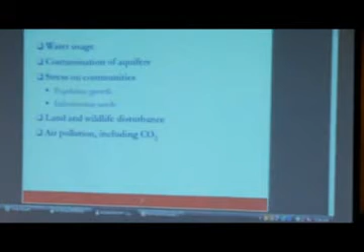So we start out with the issues, and our previous speaker outlined pretty much these same points, so I think these are no surprise, and I suspect most everybody agrees that these really are the issues we have to be dealing with.

I'd like to start by going through some historical information. This was a paper I published while at the Lawrence Livermore lab about 3 years ago, and there's two tables here, the top and the bottom. We'll go through them sequentially.

The point of the first table is that there are a lot of different kinds of processes out there, and they are quite different in their characteristics. So if you try to say oil shale is a process that is this or does this or whatever, it's most likely not going to be generally true. So you have to be very careful when you make any analysis of the situation. You're actually talking about a specific process, a specific location, because the details are different in very large ways.

Now, this particular table has been updated. That actually also appears in Wikipedia, so you can look it up at your leisure. But there are lots of different ways of generating and transferring heat to the shale, and that process can occur either above ground or below ground. And these are only some—there's probably a lot more processes that exist. In fact, when this particular table was made, EGL was the leaseholder. It's now AMSO, and I don't think the Exxon Mobil process appears on there, but it does on the later Wikipedia version, which I would encourage you to look at if you care.

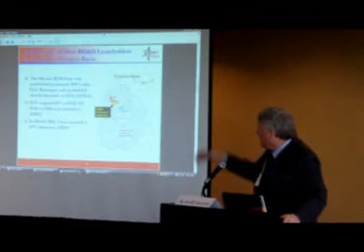So here are the leases. The yellow one is AMSO, formerly EGL. This gives you a bit of history about our company. It's now currently owned 50% each by IDT Corporation and Total. IDT is the operating partner in the R&D phase, and Total will be the operating partner in the commercial phase.

There are other companies actively pursuing oil shale. Here are three examples, taken from public presentations these companies made. You need to be aware these are cartoons representing a snapshot in time—they don't really give you detailed information about their current thinking. So I give you that caveat.

Basically, the Shell one talks about recovering the oil shale over normally a 1,000-foot interval. A lot of that is in the leach zone, which is very highly porous with a lot of water. In that situation you have to protect the water—there's just no choice, and that's why they do the freeze wall, spending a lot of money developing and demonstrating it.

Chevron is talking about some sort of proprietary fracturing inside the Mahogany zone and a supercritical carbon dioxide extraction. We don't know very much about what they're doing, since they don't talk much about it.

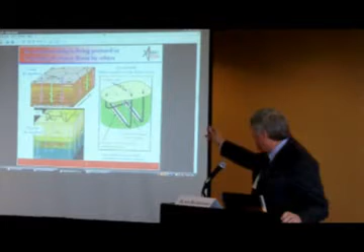Exxon is the other one, where they use a hydrofrac and then prop it open with a conductive material, using the heat diffusing from these planes. There's an advantage to using parallel plate heaters compared to the line source heaters in Shell's process—you need far fewer wells, and with these U-wells, the surface disturbance from an Exxon Mobil-type process would be far less than the geometry shown for Shell.

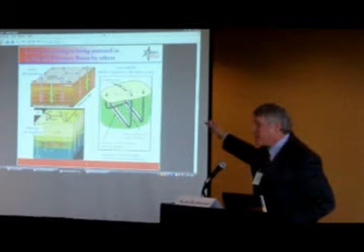By the way, Shell has actually done other things like that. I'll make the point that the reason Exxon was in this lease is that people claim private land is available. The fact is, private land is not available for an illitic oil shale, and that's why the two applicants in Colorado are going after illitic.

So anyway, I'll quickly go through the AMSO process. This is our process—we're going through the lytic shale, underneath which is an illitic oil shale cap. We're going to avoid the water contamination.

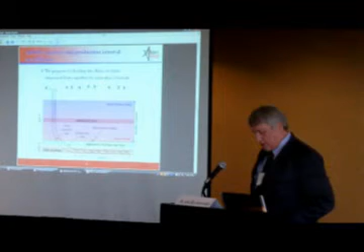If you look at the royalty generation, there's actually quite a bit of money that would be generated by an activity as small as 100,000 barrels per day. But keep in mind that 100,000 barrels per day is still more than Colorado currently produces. I can make a comment about royalties later.

I think the current industry estimate is more like a barrel of water per barrel of oil. A lot of analyses are using very old information, and in fact the cost of cleaning up saline water has gone way down. There's lots of reasons why water is really not nearly as much of an issue as people tend to make it out to be.

Projected to a 100,000 barrel per day plant, you'd use nominally 100,000 barrels of water per day. That's a tenth of a percent of state water, and it would generate 1% of the state's GDP. So it has a tremendous economic gain in terms of its use.

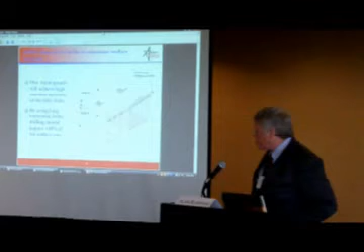This is our process in terms of trying to minimize surface disturbance by using horizontal wells, less than 10% surface disturbance. The final slide shows there's been a lot of work done historically on reclamation—Jack Clark, who's in the audience, was involved in this, at Tract C-a, Rio Blanco. You can see the green fenced-off area versus the non-fenced-off area, where the feral horses come in and eat the grass. So that's another thing we have to think about—how wildlife will affect this.

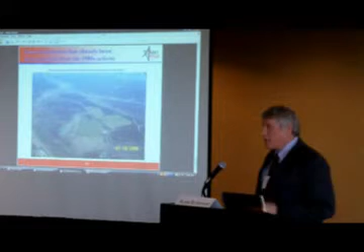Anyway, so that concludes my introductory remarks.

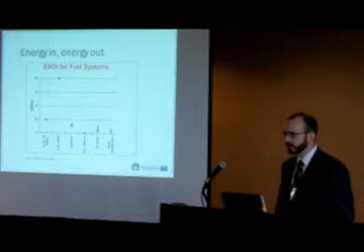Does the fuel produced from oil shale contain more energy than what went into producing it? Nothing in the existing literature, which is based on endeavors published to date, suggests that this is so. Importantly, the literature isn't small—it's far-reaching and extends back more than two decades.

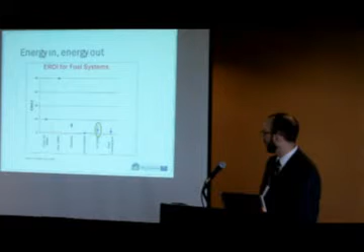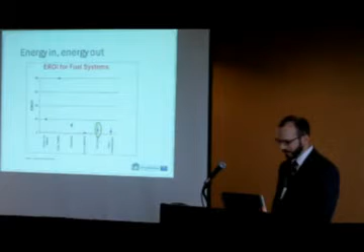What I'm circling here is the margin of error for oil shale relative to other energy sources. In that box and whisker plot, you can see the outer bound. Even at the most optimistic EROI, or energy return on investment, figures, oil shale is far from certain to guarantee energy levels on par with conventional resources, while other resources might be able to do that.

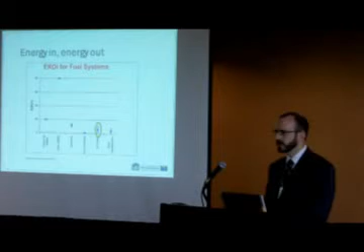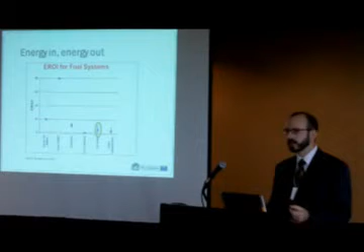A second question, maybe more important as we look to transition to a clean energy economy, is the type of fuels used to fire the heat required to finish baking shale—the Earth simply hasn't provided that yet. It's a social question of trade-offs: what is the best use of electricity, natural gas, and other energy inputs? Is it transmuting into a liquid fuel, or applying directly to other parts of the economy?

Second, we have to talk about the social burden of development. As most of the room probably knows, shale oil produces a heavy distillate, which needs to be upgraded, transmitted, and then finally refined into a saleable product.

The refining capacity in this region is not sufficient in any way to meet the expected levels of production. A substantial new infrastructure will need to be built that's capital intensive, and ultimately the viability of many of these technologies will rely on broadly distributing those capital costs. I don't think any single industry or company is going to be able to make oil shale happen on their own.

To put that in context, this is a region already benefiting from, and experiencing the downsides of, the significant energy boom for oil and natural gas development. Services, especially in the western part of this state, are being stretched to the breaking point. Oil shale has to be fit into an assessment of other ongoing activities.

As the 2008 report from the Associated Governments of Northwest Colorado pointed out, a commercial-scale oil shale operation would add to the region's population by 25%, straining the ability of governments to provide services like schools and safety services, pushing skilled workers probably beyond the threshold of what's available, and straining the availability and affordability of housing. All of this needs to be considered when we look at whether and how to move forward with developing these technologies.

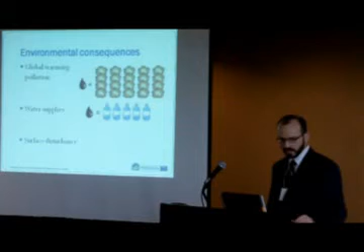And groundwater fouling is as important as water availability. The safety of these technologies in terms of groundwater have yet to be demonstrated and need to be addressed. And of course, there's surface disruption.

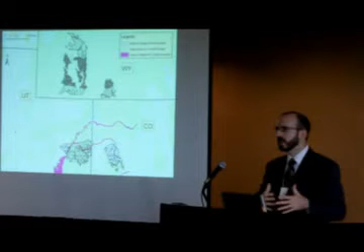We've got to fit our expectations for oil shale into a region that has already experienced a great deal of pressure. That's really the only point here. It's not that it's a game stopper per se. Ultimately, the success for this enterprise relies on economies of scale to distribute these capital costs broadly, as I said.

We must be sure that the scale of impacts against which we weigh our decisions today are commensurate with the scale of development implied by the promise that many point to. These are questions that clearly the department is thinking about, and we laud them for doing that, because these answers are the threshold to making determinations for whether and how we proceed.

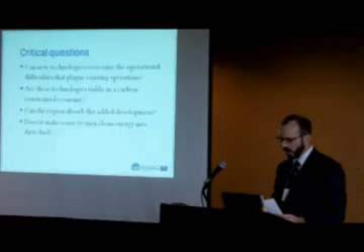Ultimately, as I said, our decisions today are going to shape the course of oil shale development going forward. Without a tremendous return on energy invested in extraction, shale oil functions at this point on paper more like a massive effort to turn electricity or other energy sources into a liquid fuel, with a minor payback for that investment, when other cheaper options for use of those energy inputs seem to be available.

Clearly, we need research to answer these questions, but early results suggest that heavy investment in this technology at this point in time is a distraction from other superior options to which our attention and our monies could be going.

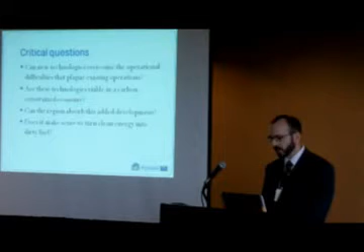In our transition to a sustainable energy economy, we need to find alternative clean energy sources that offer higher returns comparable to conventional resources, instead of playing a shell game with our energy. We also need to look to energy sources with fewer impacts that can be managed with an affirmative stewardship duty as the carrying capacity of this landscape continues to diminish. Thanks, and I look forward to your questions.

This is where the yoga instructor says, breathe deeply now, keep stretching, keep stretching. Our kind of yoga instructor coming up next, actually, somebody who is really equally involved in renewable and fossil fuel issues. Michael Tupper is the Executive Vice President of Composite Technology Development. He's a mechanical engineer. He didn't get the memo about how important federal involvement was going to be in this, so I think you were our only panelist who's never worked for the federal government or a federal lab. Should we let him speak? I don't know. Maybe that actually adds a little bit to the reasons to have you speak. So, Mike Tupper. I have to admit, though, our company has used a lot of your tax dollars to create some wonderful technology.

One of the, so I'm third, so I get to have some reflection. I think one of the most interesting things that I've seen so far today is mostly what we're seeing up here are cartoons, and I think that's a pretty good indication that this is a very new and nascent technology and industry, and it's a very complex issue. And I think everything that has been said so far is completely right, but that doesn't mean that we can all point in one direction.

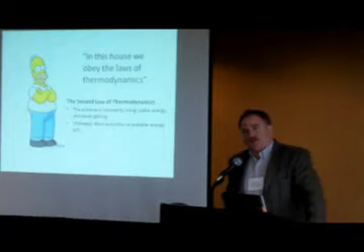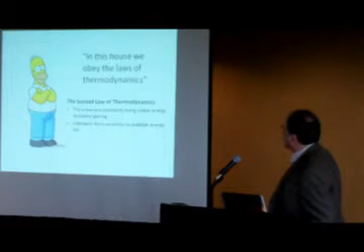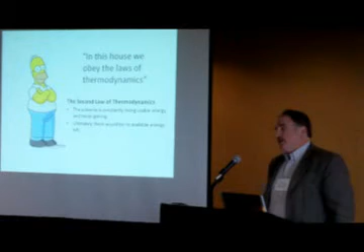I can't believe I'm going to do this, but I'm going to quote Homer Simpson. I think the engineer in me just can't get away from these fundamental laws. This is the second law of thermodynamics, and there's no way we can avoid these laws. There's a couple of interesting precepts here: the universe is constantly losing usable energy, and no matter what we do, we're going to a lower state of order. That's a very important thing to think about, not only in a global sense, but also in the things we do on a daily basis.

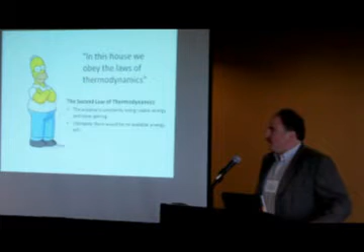One of the things I didn't include here is another interpretation of this second law: if we do nothing, we're still going to degrade. So even if we sit around and live in the trees like we used to, the world on its own, the sun and various things, will degrade over time. The matter is the time frame, and how much humans can impact that by increasing that degradation.

This is a little bit controversial maybe, but it's really true that renewable energy sources are not necessarily clean, they're renewable, at least in the time frame of our civilization. The other thing is that fossil fuel sources are not necessarily more dirty, they're just not renewable. It doesn't mean they don't have impact, but it doesn't necessarily mean their impacts are always greater than some of the potential renewable energy sources. I'll show you some information about that.

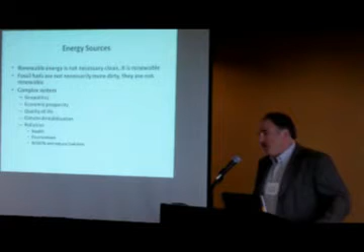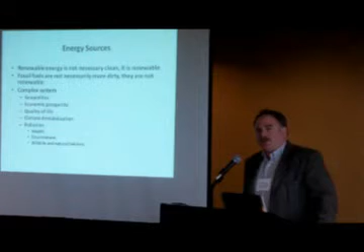Most importantly, we're looking at a very, very complex system. That's why I said everybody's opinion here was right. The gentleman from the federal government came up and said, we're doing these things, we have all these laws in place, but we all know that in 2 or 3 or 4 years, somebody else may be in this position and have a different opinion, and the direction of the government may change. That's a reality that we live with, but as a community, we need to figure out how to move forward and keep pointing in the right direction.

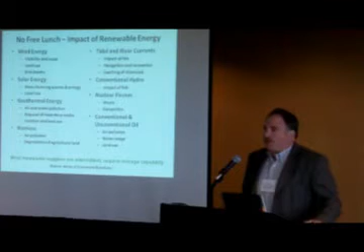I think one of the other things is the little green remark that says most renewable sources are intermittent, and so they require some sort of storage. Patty referred to the fact that we're so accustomed to turning on the faucet and getting hot water, turning on the lights, getting light. If we have a completely solar economy, we're not going to be able to turn those lights on at night without some sort of storage capability. Fossil fuels, as Alan referred to, does provide a potential for storage of some of these renewable energy sources.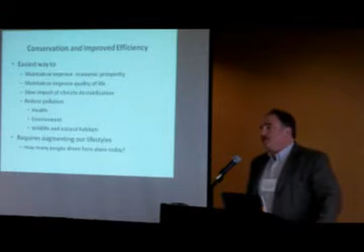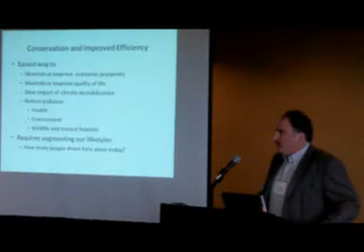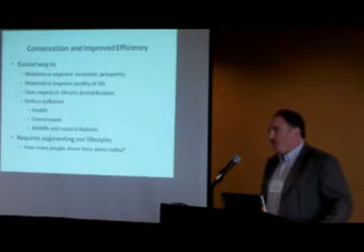You can't have any discussion today about energy without talking about our lifestyle. If, as a group here, we really wanted to make a big change quickly, conservation is by far the best way to go. The energy needs in the country and around the world are growing. China and India are just starting to suck up all kinds of energy sources, and they don't have quite the integrity we are trying to have in determining our energy future. So it's not really a local Colorado question, it's really a global question.

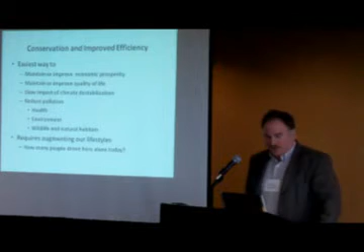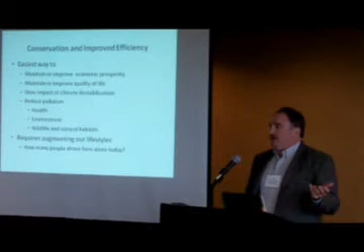But we do like our lifestyles. In fact, I made the comment on the bottom, and I was going to ask for a show of hands, but I won't. How many people came in a car down here by themselves today? That's a lifestyle change that we really need to consider making as we move forward.

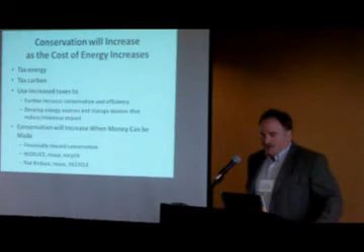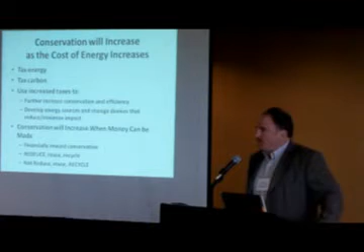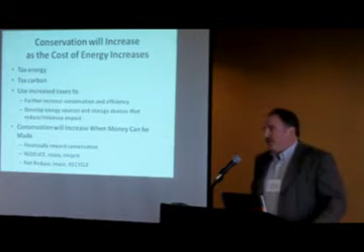So conservation, we do live in an economic society. It may not be something we like to admit, but basically conservation will occur when people can make money off of conservation. These are a couple of ways in which we may be able to do that. I won't go into detail, but one of my favorite things is everybody loves to say, I recycle. But the mantra is really reduce, reuse, and recycle. The most effective thing to do is to reduce and never have to recycle. These are just global thought processes that I really think need to be part of the conversation we're having today, as well as throughout our lives, looking at energy policy more broadly.

So as I mentioned, energy use is increasing. Renewable sources do generally have a lower impact, but they're so far behind in infrastructure that we're talking about maybe being able to get 20% renewable energy sources by 2020 or 2030 in this country. And that's still a lofty goal, and I hope to get there.

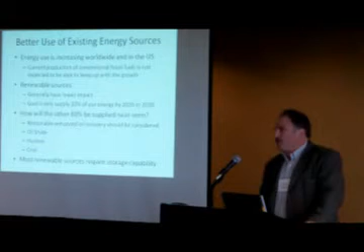But we still have 70 or 80% of our energy sources that have to come from other places. And those things fall into the issues with geopolitics and various other things, that the concept of having more decision-making capability and control over our energy sources, such as domestic sources as oil shale, really should be considered. The other alternatives have their positive sides and negative sides, but I put those in the order of where I think potentially the environmental impact could be associated with these different sources. And just as a reminder, most renewable sources do require a storage source, which does not exist yet.

So locally, I think I really represent as how I introduced my talk, in the sense that I love Colorado, I love what it has to offer. I enjoy the economy here, I enjoy the environment here, and there's a certain, as Patty mentioned in some of her cartoons, it's a really very nice lifestyle to live here. But what we do here also affects what happens in the rest of the world. And unfortunately, there are decisions being made around the world that will impact us regardless of what we decide here today or in the future. And those are things that are all very important to keep in mind.

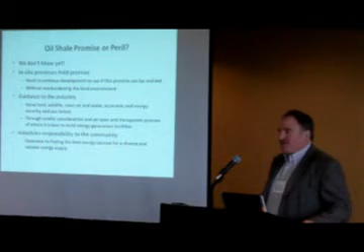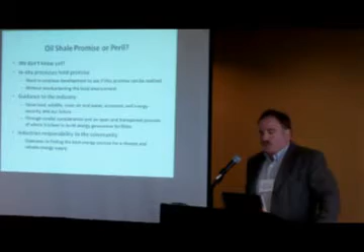So, big question, oil shale, promise or peril? And I think after just even the few speakers that we've had here, we don't know. We certainly don't know. But I think potentially the in-situ process has a lot of promise, and it really needs to be, the development of that really needs to continue. And we need to start answering those questions, whether it is a promise or whether it is a peril.

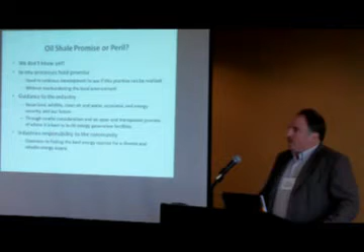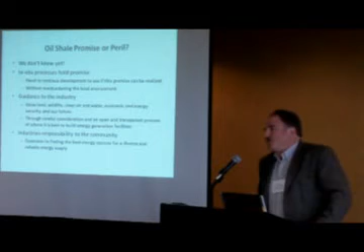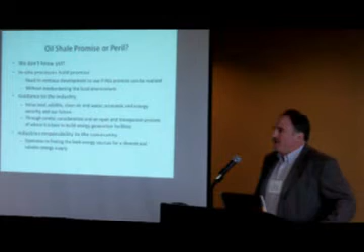And I think that, as a community, we should provide guidance to the industry. And I thought it was interesting, I don't mean to pick on him, but our friend from the federal government said, we're going to look at a business model that's separate from socioeconomic, environmental, air. These companies would not be pursuing it unless they thought that there could be a positive business to come out of this. And in their business model, they are addressing all these types of things. But as a community, we need to make sure that they're open about it and that they answer the questions that we have to satisfy that the process and the approach is really going to be satisfactory to what we want to do moving forward.

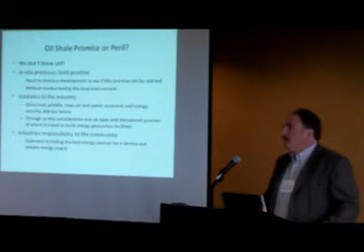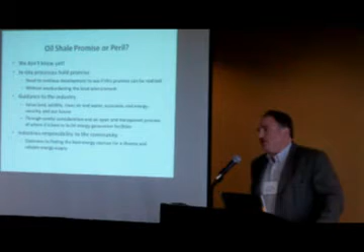And industry's responsibility to the community is to have an open process, to look at a variety of different energy sources, and for them to arrive at what is overall the best source and solution for the community. And that will be an economically beneficial solution for the companies, and because of the activity of a lot of the people in the room and the federal government, that will also be one that should hopefully meet our environmental and socioeconomic needs as well. So, thank you.

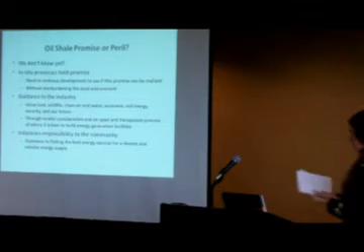We'll have a few minutes here for an exchange among the three, and I guess I would invite you to imagine that we have hung out for a while and ended up in a bar and it's hours later now, so that you could consider saying to each other something in the framework of though I wouldn't necessarily have thought it earlier in the day, when you say the point about such and so, I really have to say you've got something there. But also, if you might think about where you would say, oh, I hope at some point you would really want to think a little bit more about or reconsider the point you made about such and so.

If it could be pitched a little bit, it could be a coffee shop. I don't want to propose any particular fluid here, but if you were to approach your comments to each other, but of course the main thing is whatever you would like to say to each other after hearing the presentations for a few minutes. So, anyone want to?

Okay. Well, Chase, yes, you... Are you close to the mic? I'm not sure. I don't know. Is it on? Okay. So Chase, I actually read some of your material that was on the web, and your talk had a lot of those things.

I'd like to address a couple issues. The issue of no energy gain, that comes up frequently. It's really a nonsensical issue in my view.

Companies would not be pursuing zero energy gain unless there were massive tax subsidies, like there is for ethanol. There may be a slight energy gain for ethanol, but anybody who seriously looks at this knows there's a substantial energy gain in oil shale. Estonia generates 95% of its electricity from oil shale—it wouldn't be doing that otherwise. To draw an analogy from the literature, oil shale has the same energy profile as a baked potato. If you look at all the energy it takes to grow a baked potato and all the water involved, you see that it's actually much more of a problem than oil shale.